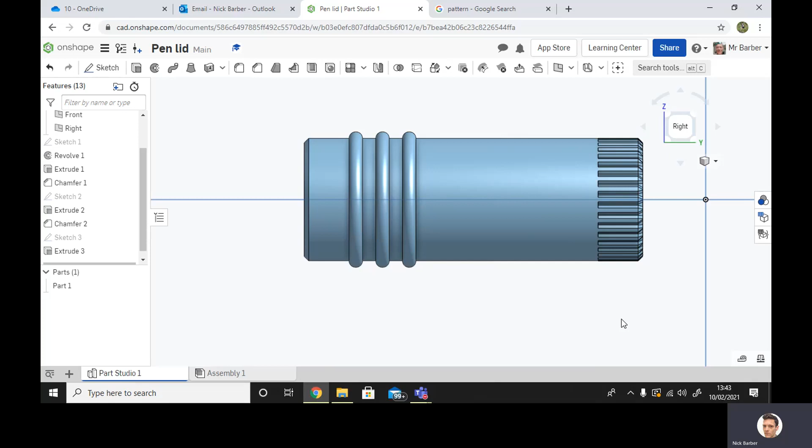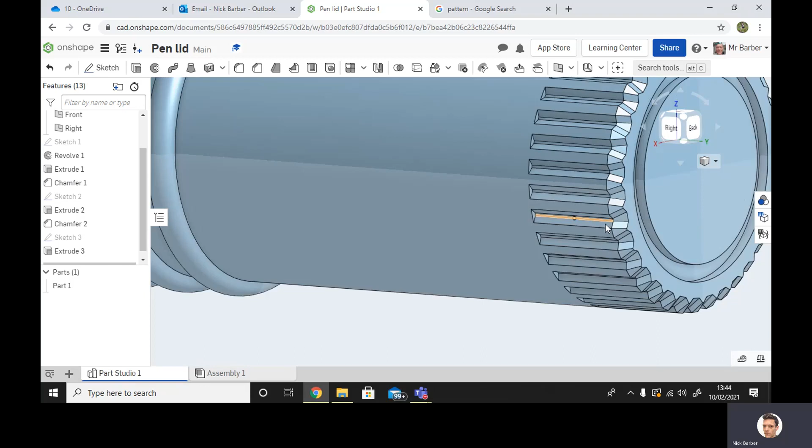You'll notice I've made a few changes to my pen lid. Firstly, I've reduced this chamfer. I've gone over to chamfer number 1 and reduced it from 3mm to just 0.5. I also took this face, selected it, and put a chamfer on this circular pattern, also at 0.5.

I added 2 concentric circles to the end of the cap and used my extrude tool to push those concentric circles back to remove material a distance of 0.5. I can show you how to go about doing that. If I just right click here, we can edit it.

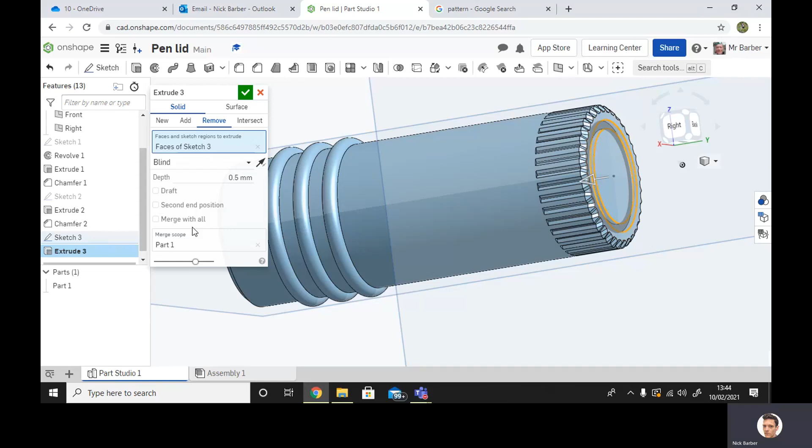We can see here it was on add. We can add material, we can take material away. So we're going to remove it instead. I've removed material there, a distance of 0.5. So we'll accept that.

Next, what we're going to be looking at is I would like to put a clip on this lid. This is the top, and this is where the pen will be inserted. The problem you're going to have is it's really difficult to draw on a curved surface - it's not possible, you can't sketch on a curved surface. So we're going to look at how to overcome some of these challenges.

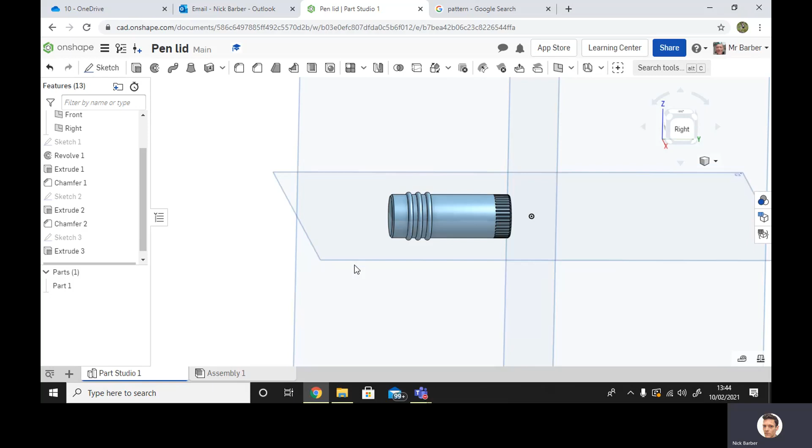What I'm going to do is take this surface here, sketch on there, sketch an object, bring it up here, and then project it in that direction. So I'll take this surface first as a sketch.

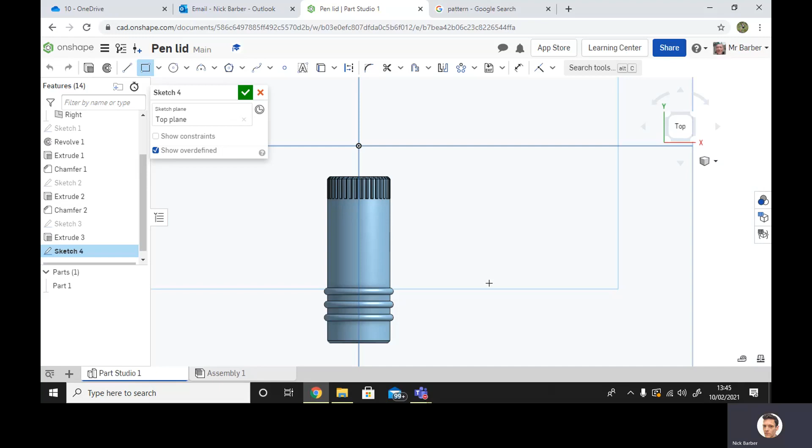I'll take my rectangle tool. I'm going to look straight down on it, so we'll go to the top and go zooming in. I'm going to draw from the center a distance of, let's have it at 3.5 by 2.5. 3.5 enter, 2.5 enter. There we go.

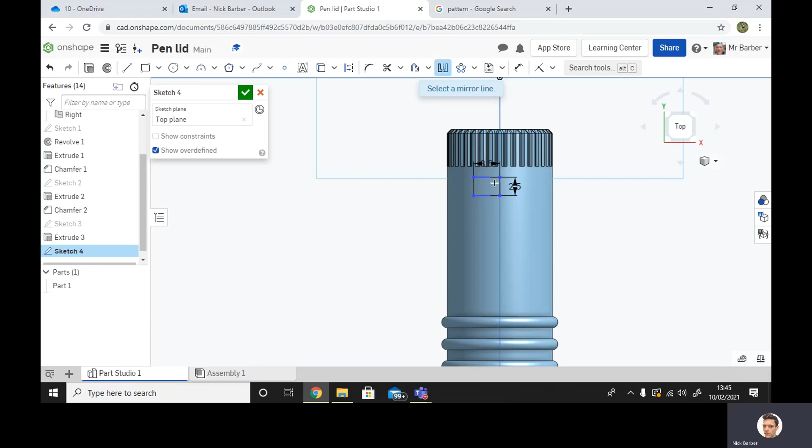Happy with that. Next, I'm going to use my mirror tool. Select the line that we want to mirror - that's it there. Select the entities. There we go, got 2 of those now. Trim away the excess. Now I've got just 1 rectangle, and that's ready to be extruded.

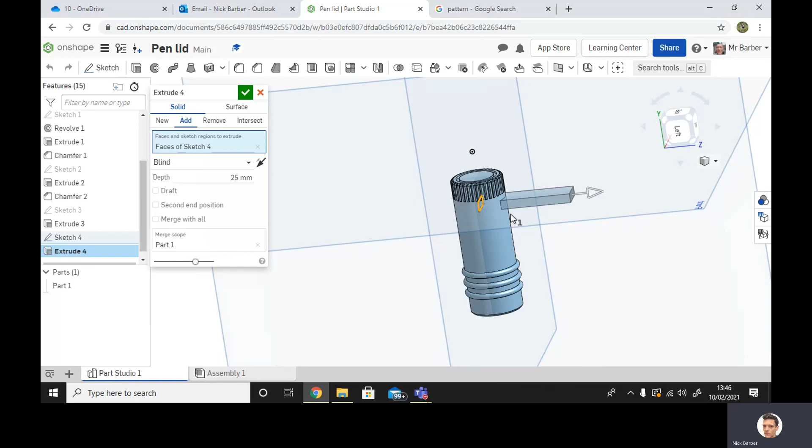This is going to form the top of my clip. There you can see it's come straight out - I didn't sketch on the actual curved surface, I sketched on that first. Which work plane was it now? If we have a little look, it was on the top work plane.

Now I don't want that to stick out that far, so I can just get an idea of what's going to look right. Let's take it at 10 mil - that would mean it's, let's make it 11.

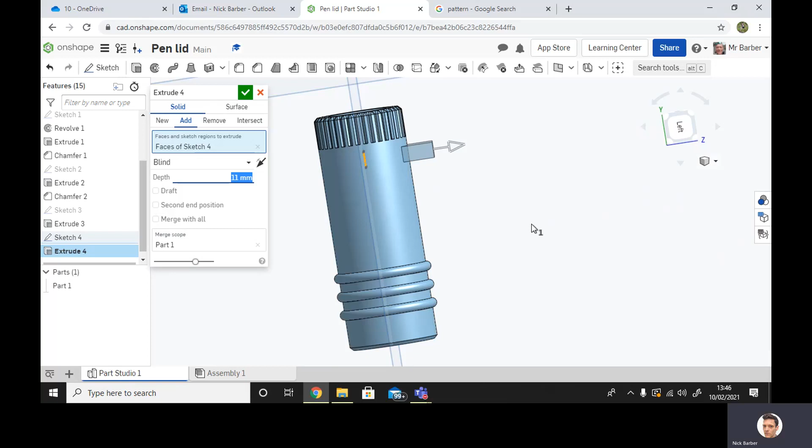Okay, next what I'm going to do is take this surface here. I'll accept that. I'm going to take this surface here, and that's going to be a new sketch. I'm going to sketch on here a rectangle from this point to this point. Whoops - control Z, made a bit of a mistake there.

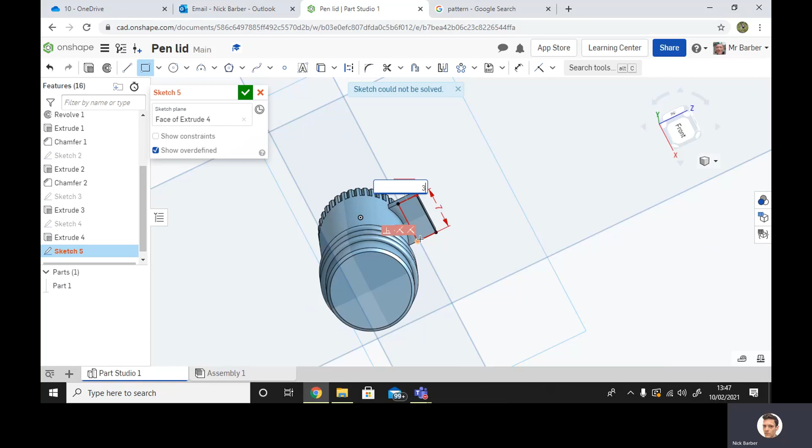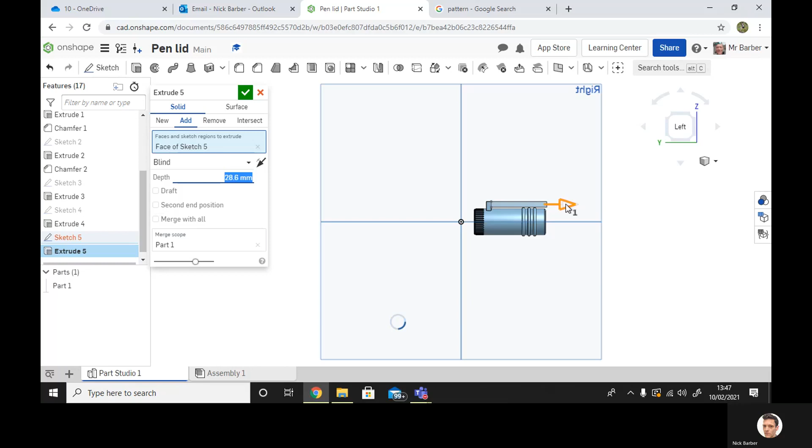Take that rectangle, click, drag - 7 mil, let's make it 3 mil thick. 7, enter, 3, enter. Click OK, extrude that. There we go, going to make it a little bit further - a little bit further. Looks good to me.

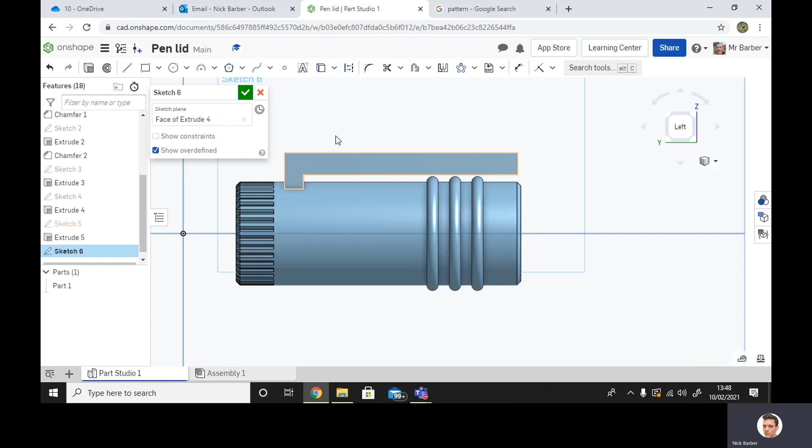I'll zoom in. So this will clip into place quite nicely. I'd like to add a little feature there, just a little notch. So I'm going to accept that, select this surface, sketch on that surface, select it, take my circle tool, and I'm going to draw a little circle.

Just until the point where it comes into contact with the edge of the lid. Take that circle tool off, I can now pick it up and slide it along that line. I clipped it to that line, you might have noticed. I'm going to bring that up there, so that'll act as a kind of a latch, a bit of a lock.

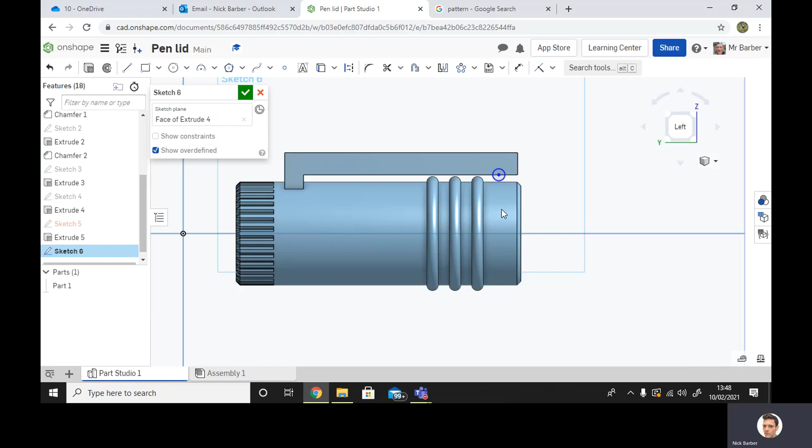So when you slide it onto your jacket or shirt pocket, it's not going to shake loose. What I'll now do is go back to that extrusion. I'll accept that. I'm going to edit it and just push it back a little bit. Accept that, have a little look.

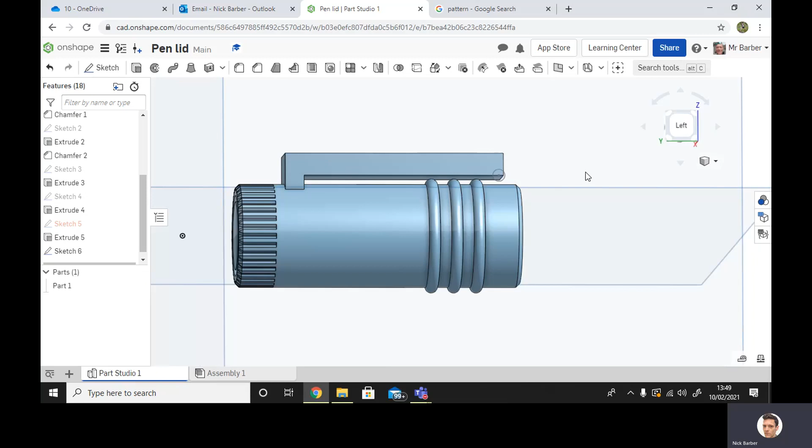Maybe just make it a little bit longer again. Go back to that extrude, edit, just a notch a little bit longer. I could do this with more specific geometry, but I'm just rushing through the process to show you what's going on and how to go about doing it.

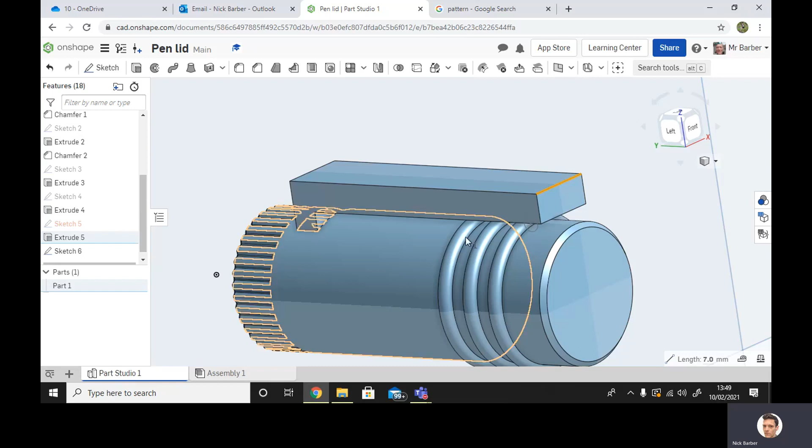And next, what I need to do, if you remember, I can't remember what distance this was. I'm pretty sure it was 7 millimeters. If I click on that, yeah, you can see here it says at the bottom, 7 millimeters. I need to extrude this feature 7 millimeters as well.

So what I'll do is go to extrude. There we go. I don't want to extrude it that way, I want to extrude it this way. Total distance 7 mil. Enter.

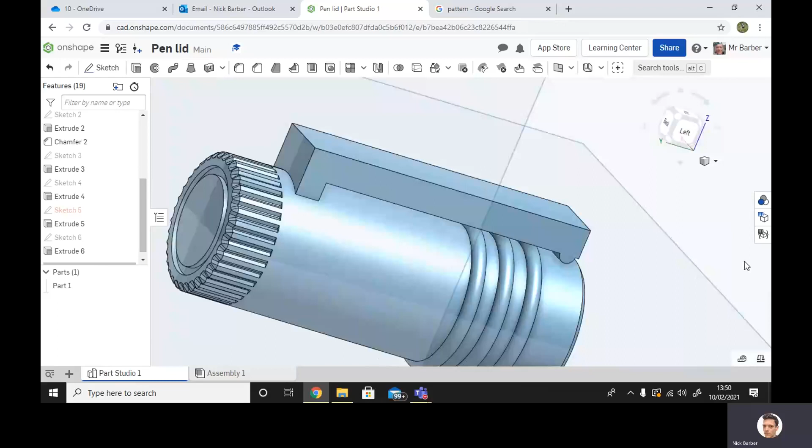Accept. Yeah, what I could do now, spend a little bit of time... looks a bit lumpy, doesn't it? A bit clunky, a bit unrefined. So what I'll do is select some of these edges, and I think I'll put a bit of a draft on that there.

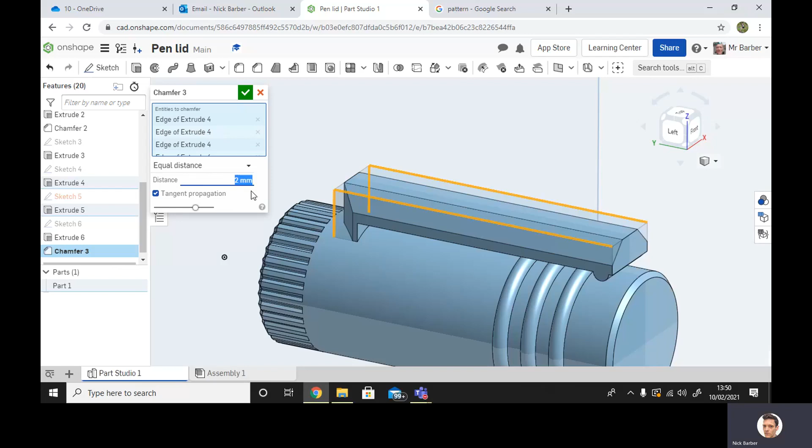Let's have a look. I say draft all the time, but what I actually mean is chamfer. Change that chamfer to maybe 2 mil. How's that look? A bit better, a bit better. I think I'd like to chop off those corners.

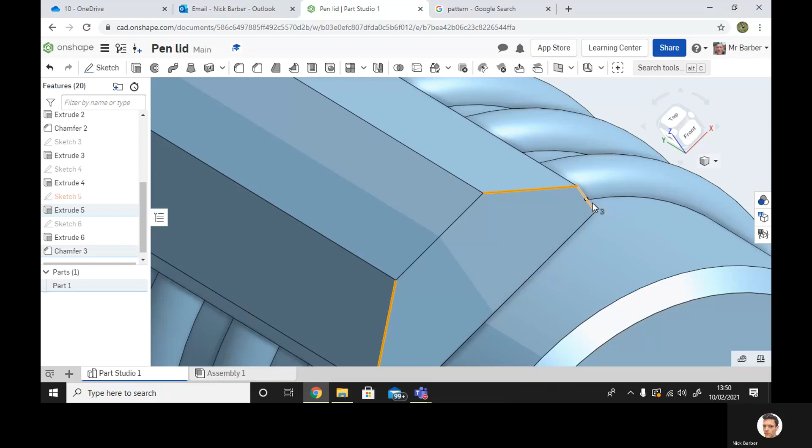Let's have a little look. Accept that. I'd like to bring these corners here, these edges, this edge, this edge, and make some alterations to this. So, 2 mil, have a look. Yeah, that looks better.

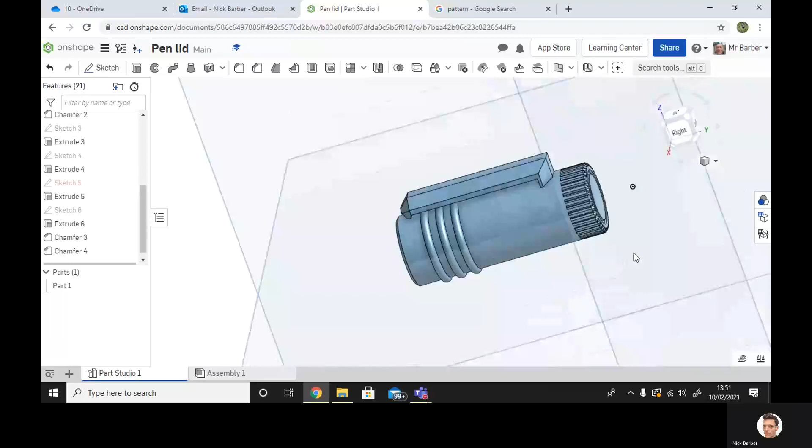Put a chamfer on here as well, I think. Make it the same, 2 mil. Is that too much? Yeah, it looks weird too. That's not going to work. Try 1. Enter. Accept.

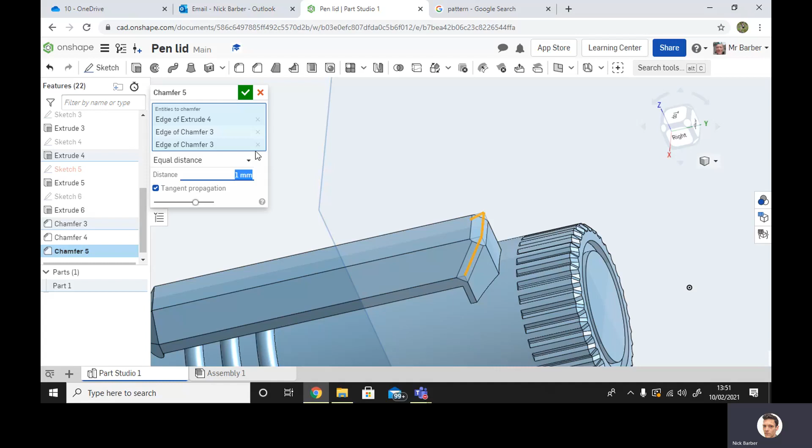All I need to do now is put that hole straight down the center. That should be an easy job. Looks like a flask, doesn't it? Yeah, a big thermos flask or a little thermos flask.

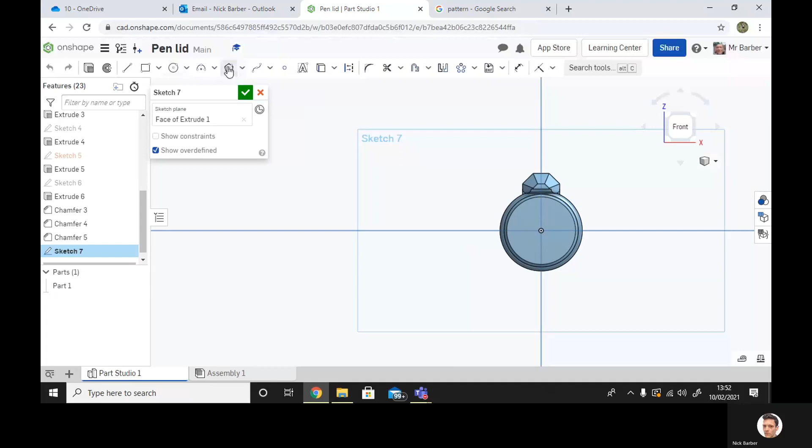Let's take this feature now, go to the front view, let's put a polygon on this face. Sketch. Polygon from the center, there it is. 6 sides, so I've already got 6 sides. Let's keep it at 6 sides because that's what our barrel of our pen was.

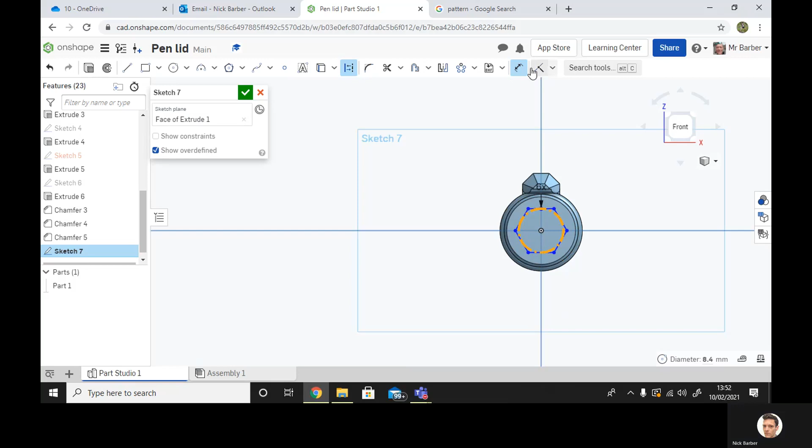Let's get the diameter on there, it needs to be a diameter of... come on... let's try again. Needs to be a diameter of 10 mil. Okay, let's just fuss on with this a little bit more, I'll get there. There we go, 10 mil.

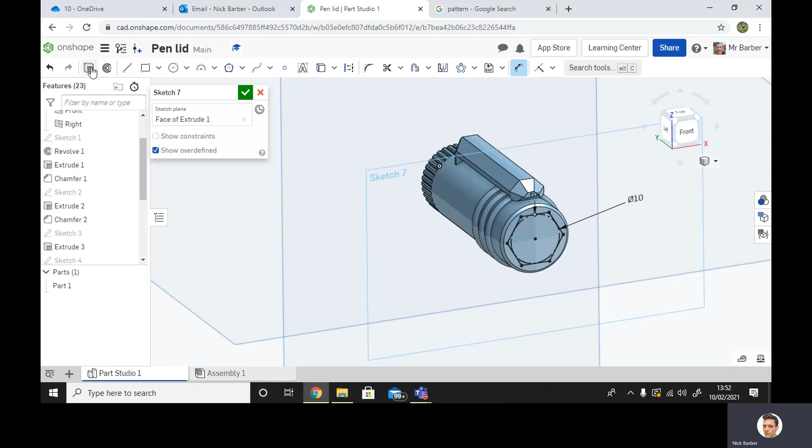Enter. Yep, that's good. And then we can extrude to remove. Let's have it remove 30 mil of material. There we go.

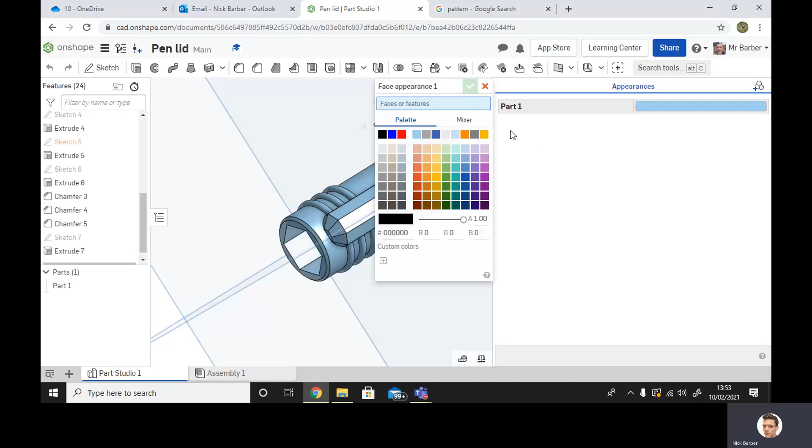Needs to be the same color as the end cap. How's that looking? That's not bad, that looks pretty cool, yeah. Add some color, same color as the end cap. In my instance, it was this gold all over the entire part. Accept that, there we go.

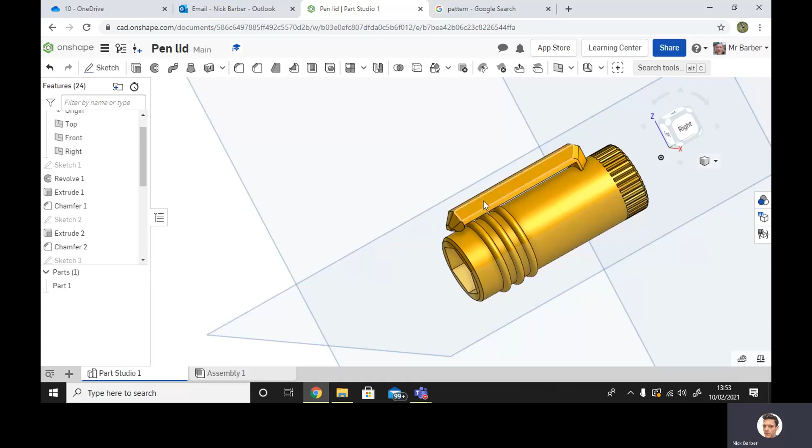Ready for us to put this together, to assemble it, to possibly 3D print. Now I'm going to tell you, if you do want to 3D print parts, deselect, put this away. If you want to 3D print a part, all you need to do is select it, right click, and we can say export, and export it as an STL, so it's in the correct file format for 3D printing purposes. Okay, thank you very much.

And next up, we're going to look at assembling and creating our working drawing. You've already done working drawings, you know what to do, but we're going to look at how to create the assembly.